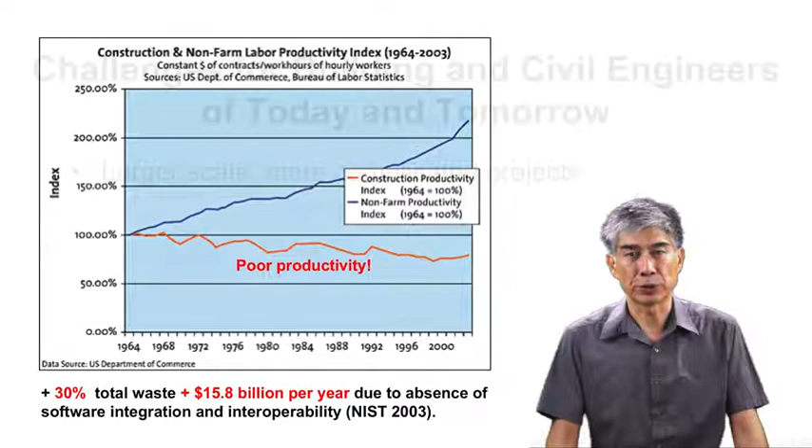The report pointed out 30% total waste and $15.8 billion per year due to absence of software integration and interoperability as the main cause for poor productivity. It was said that the U.S. government therefore started to take actions to help the construction industry improve its productivity with the establishment of the National 3D-4D BIM program by the U.S. General Services Administration.

Besides the perspective on productivity improvement, let us think about the many challenges all building and civil engineers are facing today and beyond. After the following discussions, I think it should become clear to you why building and civil engineers need to develop better ability and deserve to be equipped with better technologies and tools, like those provided by BIM.

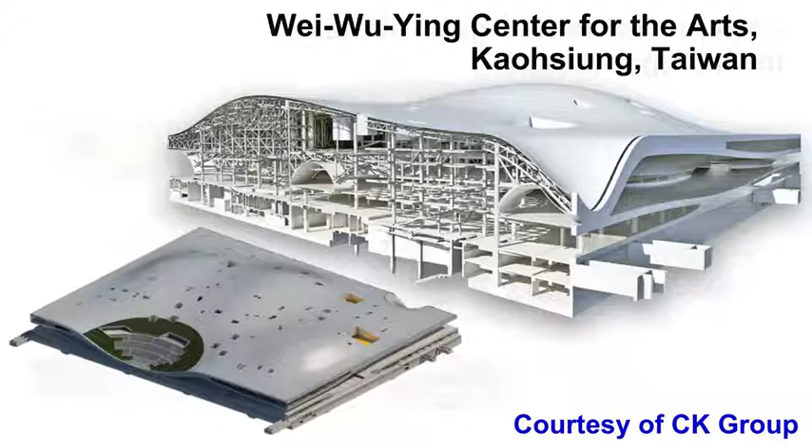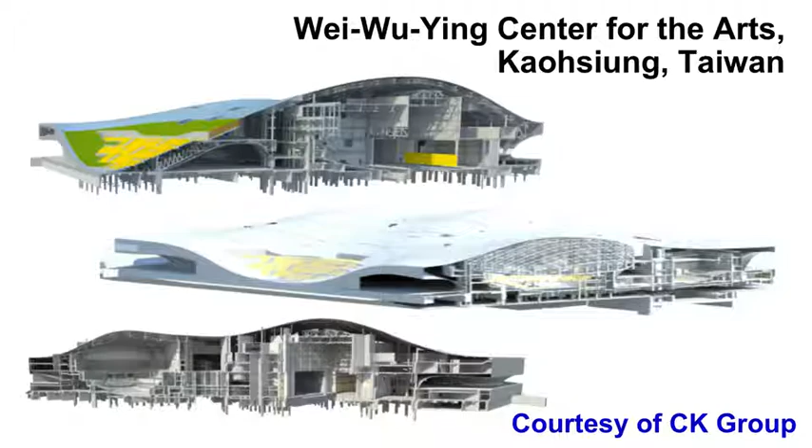Nowadays, engineers are dealing with more complicated projects of larger scale. As you can see, this is the Wei-Wu-Ying Center for the Arts in Kaohsiung City, Taiwan. There are a lot of curved surfaces and the building is very complicated in terms of connected spaces of various functionalities. These are other views of this building project. It says that no typical plans can be found in the design. How many 2D drawings do we need to fully communicate the design if only 2D drawings are used? Obviously, engineers need better tools like those provided by the 3D BIM approach.

Engineers are not just dealing with more complicated and larger projects. They are often asked to build things faster, deliver things with better quality, and provide a safer working environment. For minimizing social and economic impacts due to construction, civil engineers often need to develop new construction approaches with very good planning and coordination of all construction tasks.

For example, the Wells Street reconstruction project in Chicago only interrupted the traffic service for 9 days each in 2 consecutive months in 2013. The old double-decker steel bridge over the Chicago River serves 12,000 vehicles and 70,000 train commuters daily. The 9 days interruption included 2 weekends and 5 working days in between. It was said that the traditional replacement construction would take about a year, which would impact the life of Chicago people significantly.

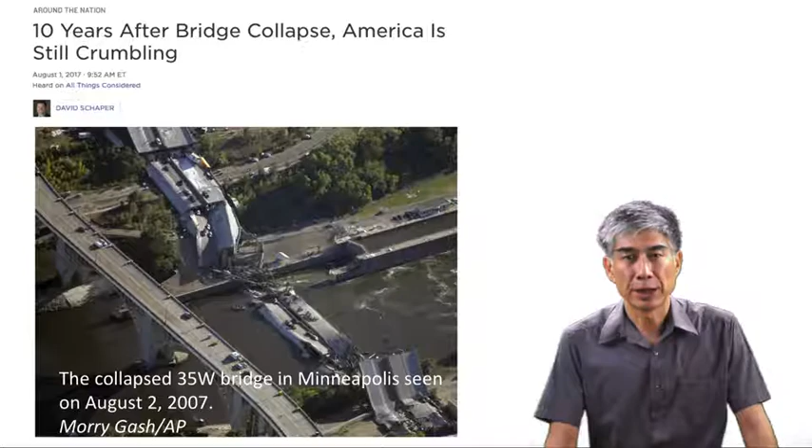Nowadays, engineers are asked to address full life cycle management issues, especially for the operation and maintenance stage. Without good maintenance, failure of infrastructure may occur and impact our society significantly. Although people realize this, the task for maintenance is not easy but costly, especially when it is not carefully considered in the design stage and the information management for maintenance is not effective. Basically, we spend only a short period of time for design and construction when compared to the time for operation and maintenance.

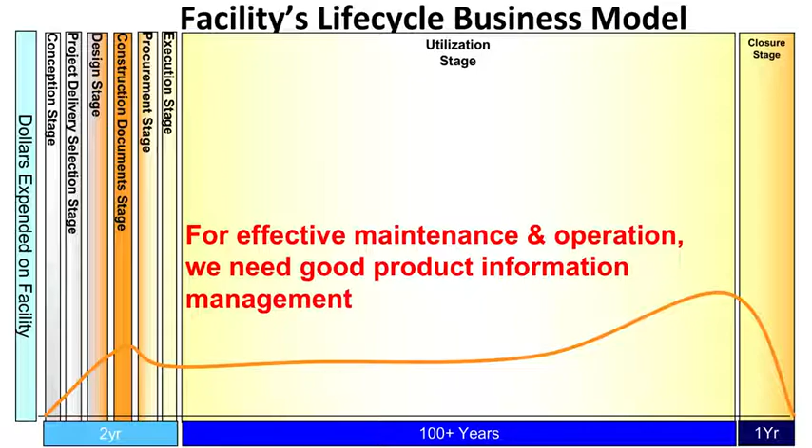For effective maintenance and operation, we need good product information management for our facilities. However, our current mainstream for product information management is still 2D CAD. We are building things in 3D, but in the past, we only had 2D tools and drawings to express our 3D design for communication and integration. So engineers need to convert 2D drawings back to 3D design for construction and maintenance. It's not difficult to know that information loss and inconsistency can easily occur during this 3D, 2D, 3D conversion process.

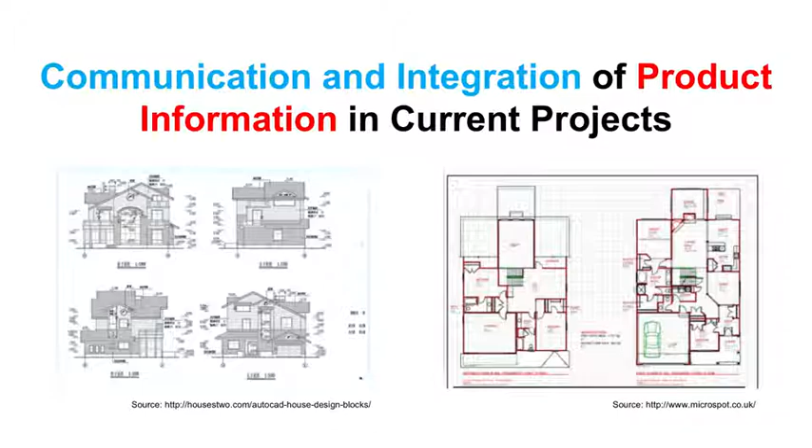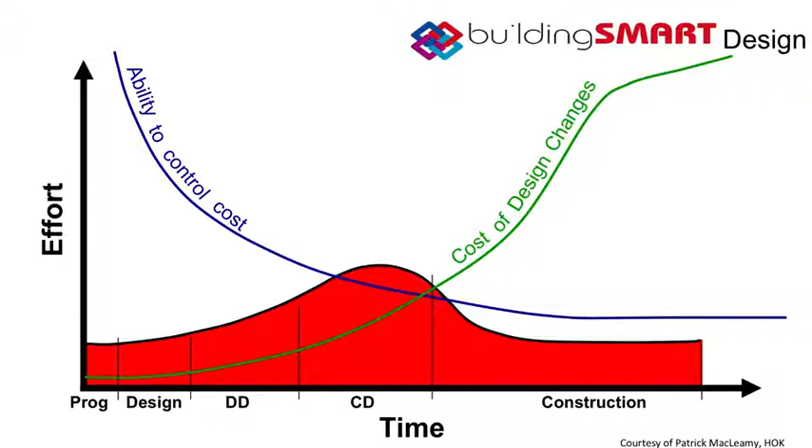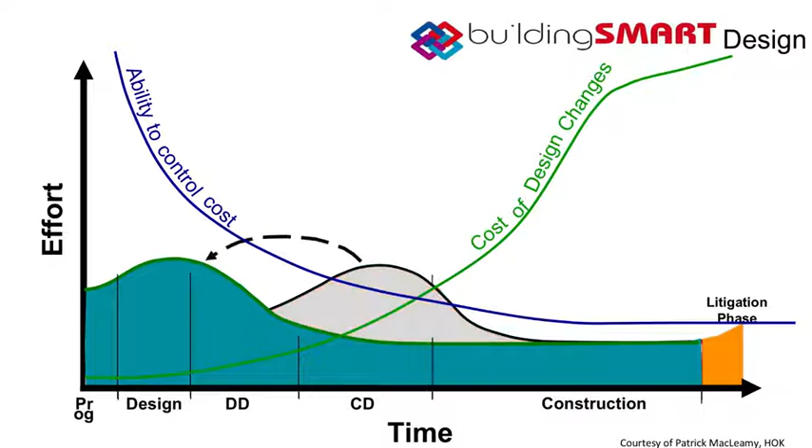In our current construction practice, the greatest effort is required to develop construction documents. Also, we know that the ability to control costs reduces from the beginning of design. On the other hand, the cost of design changes increases as the project moves on. If the project unfortunately goes into litigation, it will be very costly. So the idea is to move the efforts forward in the process to have a better control on cost of design changes and minimize the possibility for litigation.

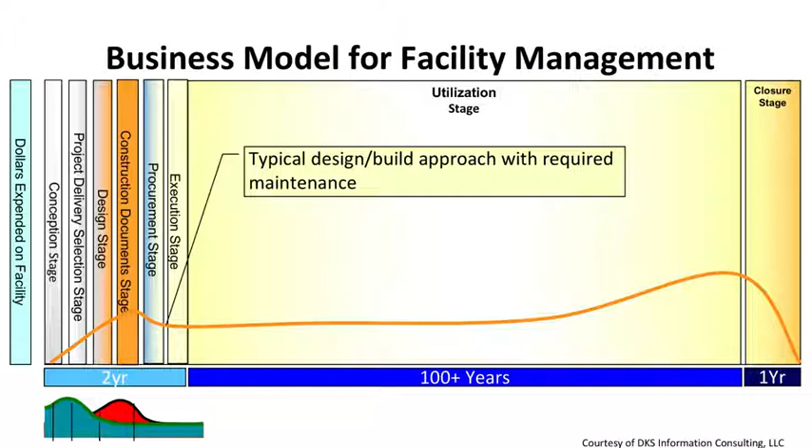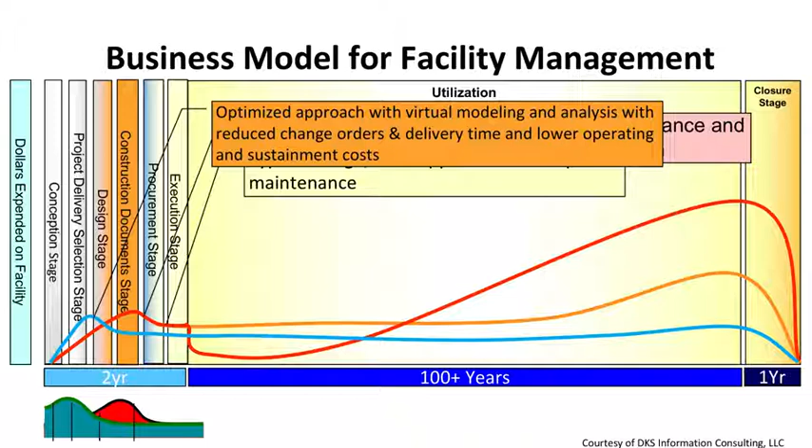Furthermore, let us take a look at the business model for facility management. The gold curve represents the typical design-build approach with required maintenance. The red curve represents the typical approach failing to do routine maintenance and having to replace items early and more often. The blue curve represents an optimized approach with virtual modeling and analysis with reduced change orders and delivery time and lower operating and sustainment costs.

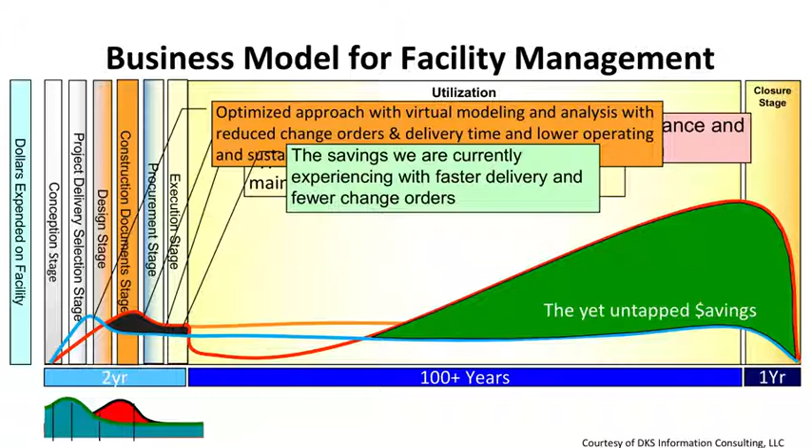The first savings identified are those coming from faster and lower cost delivery we just discussed earlier. These are the savings we are currently seeing from the implementation of virtual design and construction technology such as BIM. However, the significant savings are in the region of operation and maintenance phase, if we can do a better job with effective lifecycle product information management for facilities.

Nowadays, engineers are also asked to have more sense of humanity and to provide total solution as a better service and with more consideration on user experiences. Engineers need to communicate engineering outcomes in a better way that non-engineers can easily understand. It is obvious that 3D presentation taking advantage of the virtual reality technology is much better than using 2D engineering CAD drawings. Both disaster prevention and sustainability are civil engineers' major responsibility.

In the United Nations Sustainable Development Goals, many agendas are highly related to building and civil engineering. For example, clean water and sanitation, innovation and infrastructure, sustainable cities and communities, and so on. Moreover, the demand for intelligent facilities with healthy environments is getting stronger in recent years.

Let us take a look at the Industrial Revolution. The first industrial revolution introduced machines to replace human labor. The second one brought mass production. The third one introduced automation. The fourth industrial revolution may be highlighted by the following two things: intelligent cyber-physical system and mass customization. Because the construction industry is greatly influenced by the Industrial Revolution, it's not difficult to see more intelligence will be required in the coming years for engineers to design, build, and maintain facilities. Of course, there will be not yet known challenges in the future awaiting engineers.

With all the aforementioned challenges, I hope I have convinced you that engineers need to develop better ability and deserve to be equipped with better technologies and tools, like those provided by BIM. In my opinion, BIM represents a new ability of digital simulation of real world and information knowledge management in the cyberspace for better beforehand planning, design, coordination, and integration of architecture, engineering, and construction tasks. It's not just an individual ability, but a team one, which requires good team communication and coordination, and information sharing and integration.